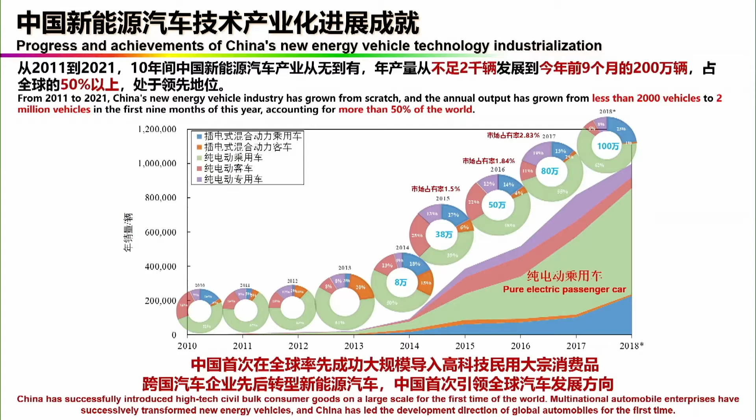Considering our history, this is the first time for China to introduce high-tech and high-volume consumer products in the world. And for the Chinese automotive industry, this is also the first time to lead the technical development directions in the world. So we can say this is an amazing achievement, and this is what is happening nowadays.

So people will ask several questions. The most important question is how does this happen, or why can this happen in China? What's the internal logic or reason? The second question may be, will these successful experiences also be effective in the future for China? And will they be learned or used by other countries in the future? These are very interesting and important topics, and tonight's lecture was prepared facing these three important questions.

So let's come to the first question. How did new energy vehicle technologies in China develop so quickly? The story goes back about 30 years. In 1992, the first proposal to develop new energy vehicles was made by Dr. Qian Xuesen, known as the father of the Chinese aerospace industry. He was very interested in China's automotive industry, and he wrote a letter to the central government explaining why China needed to develop electric vehicles and why this was a chance for us. But at that moment, China didn't have the conditions to develop this technology.

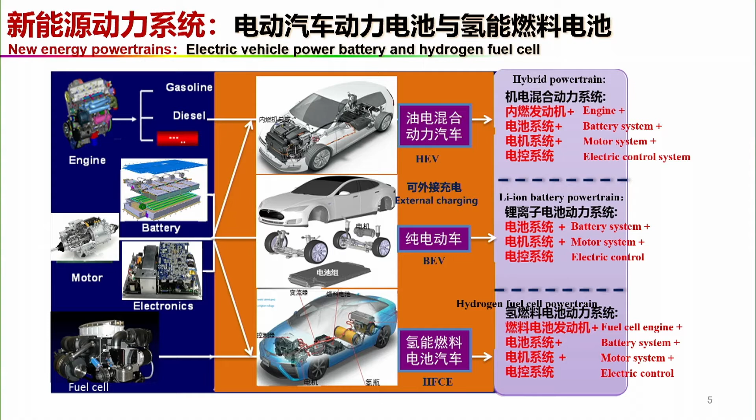detailed technical roadmaps. And actually, at that moment, about 15 years ago, there was lots of argument, lots of discussions on which kind of technology or which kind of technical roadmap is the best for the Chinese automotive industry. And in order to answer this question, the central government started several 5-year projects. So it starts from 2001, corresponding to the 10th 5-year project.

And after 2 5-year projects, at the end of the 11th 5-year project, that is around 2008, all the different kinds of new energy vehicle powertrains were developed and demonstrated in the Beijing Olympic Games. There were hybrid city buses, hydrogen fuel cell buses, and also battery electric vehicles. And all these technologies are compared with each other. And also the cost, the durability, the reliability are evaluated for the market

feasibility. And at that moment, the results are not very good, because as a research project, all of these projects have very good results. We can say all the research projects were successful, but it is not mature for the market introduction. And the only hope is on the battery electric vehicles, because some other technologies have very big issues, like the hydrogen fuel cell. The cost was still too high, and also the durability is short.

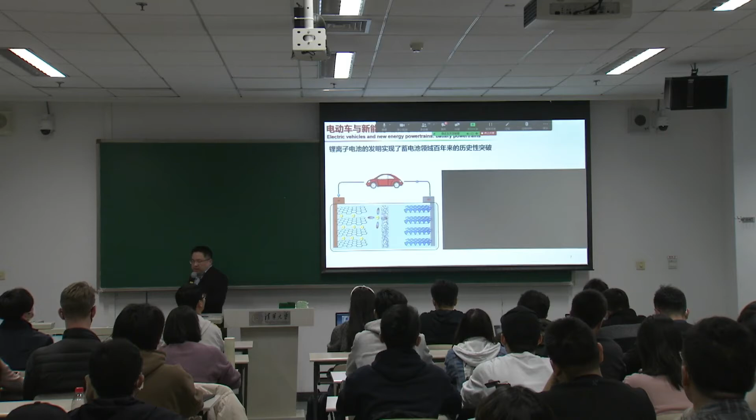And for the internal combustion engine hybrid technology, it needs fuel consumption and cannot realize zero emission. So the only hope relies on the battery electric vehicles. And on the other side, for the battery electric vehicles, the development of the lithium battery trend is very... the development of lithium battery technology.

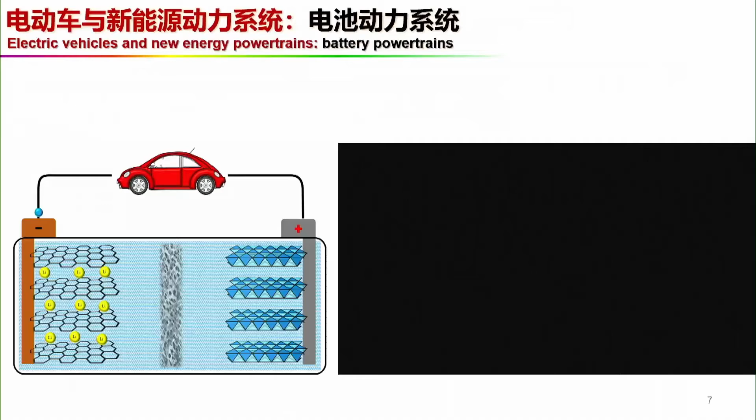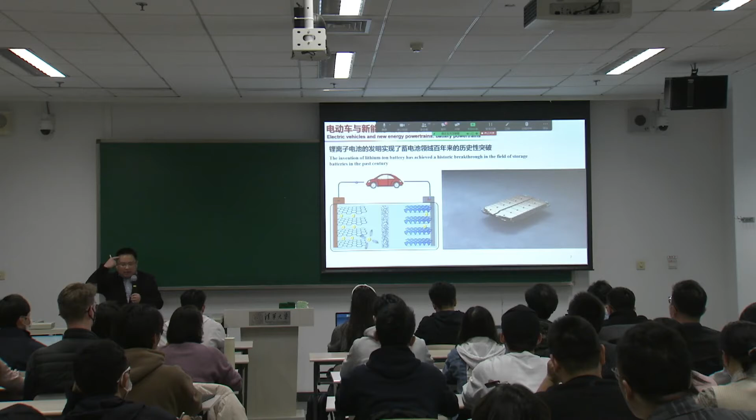Here is the video which was provided by General Motors, and we can see that for this lithium battery, this is a single cell, so lots of single cells compose a module, and this module can be integrated with the vehicle chassis very well, and this technology makes the design of the vehicle very flexible, and also the performance of the vehicle very good. So we can see that the invention of the lithium battery has achieved a historical breakthrough in the field of storage batteries in the past century. So this makes it possible to develop the new energy vehicles.

So in the year of 2009, the consulting expert group made several discussions and decided to focus on the pure battery-driven technology, which means if we want to develop new energy vehicles, the highest priority should be focused on the lithium battery and its corresponding pure battery-driven technologies. And after that, if we have this very good lithium battery technology, then we can develop the internal combustion engine hybrid vehicles, and then the hydrogen fuel cell vehicles. So this is the decision which was made in 2009.

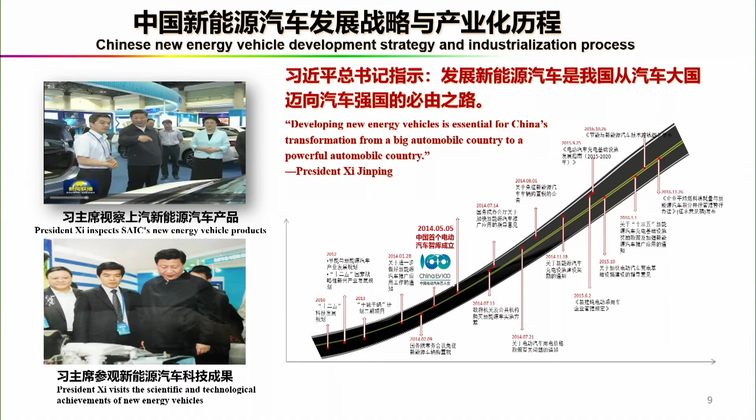And after that, the central government and also lots of local governments, that means the government for each province or each city, provided lots of policy support for the development of the new energy vehicle, especially the lithium battery and the battery electric vehicles. And then this technology developed very quickly.

And the competition in this area is not so high, so we suggested the companies enter this market first. And after we accumulate several experiences in technical development, then we can enter the medium and high-class passenger car market.

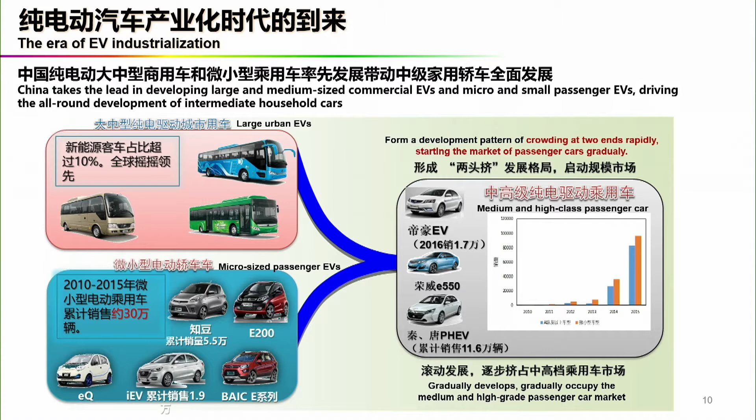So nowadays in China we can see lots of very high-performing electric vehicles, such as vehicles provided by Xiaopeng, by SAIC, by BYD, by Xiaomi or Lixiang or Weilai, such companies. So from any way, we can say that this strategy has a very successful result.

And it is predicted that 5 years later, by 2025, the cost of the lithium battery will be 0.5 yuan per watt hour. And nowadays the cycle lifetime is about between 5,000 to 10,000 times, which means this lithium battery's working lifetime can fully fulfill the requirement of automotive application.

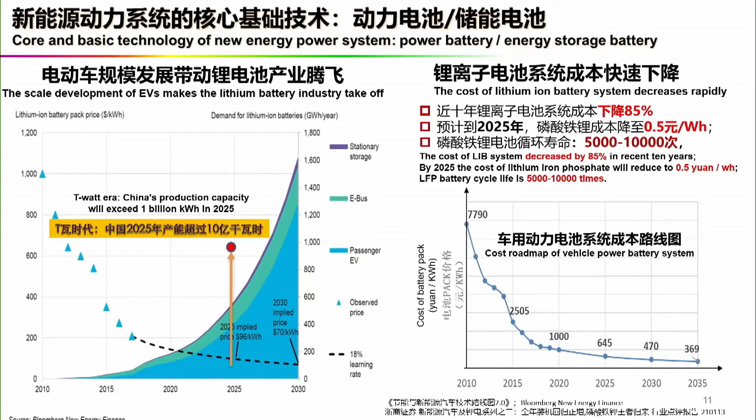And not only is the cost reduced in a very big gap, but also the energy density increases very rapidly. The power density of the lithium battery itself increased from less than 100 watt-hour per kilogram to more than 300 watt-hour per kilogram. And also for the system level, the specific energy increased from around 40 watt-hour per kilogram to about 200 watt-hour per kilogram. Wow, this technical development is also amazing.

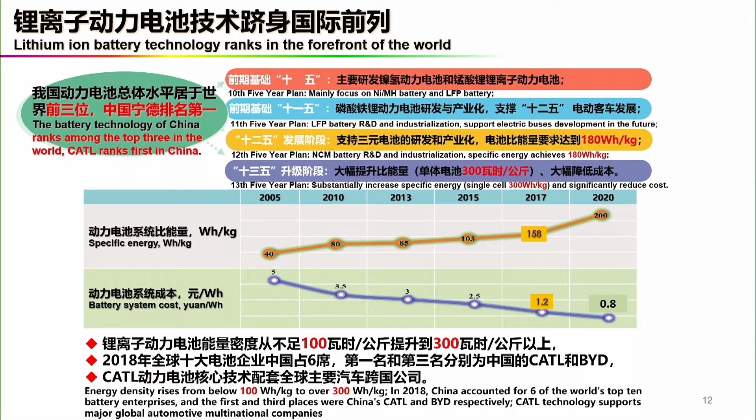So totally, we can say that the battery technology of China nowadays ranks among the top 3 in the world. And also the company CATL in China ranks actually first in the world in the battery industry. So this is the achievement of the battery industry.

And when we look into the key technologies, or the scientific issues of the lithium battery itself, we can see that the performance for mileage and life have been basically solved. So nowadays, the driving mileage of electric vehicles generally locates around 300 or 400 kilometers to 500 or 600 kilometers, which fulfills the requirement of our daily use.

But there are still several issues need to be solved. One is the thermal runaway for the safety problem. The other is the driving range decline problem in winter. And the third is the super fast charging - how to charge this battery very quickly. So our research also focuses on these several aspects.

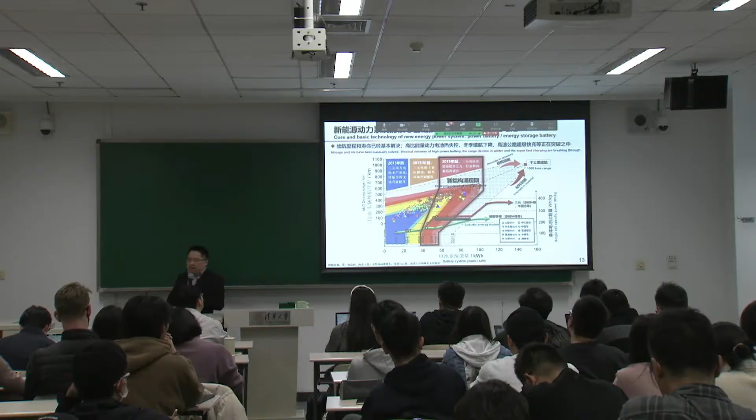And the target is to realize a battery system that can guarantee passenger cars that can provide more than 1,000 kilometers driving mileage, as well as guarantee its thermal runaway safety and also its reliability in winter time.

And this is some pictures of our lab. This lab is named the Battery Safety Laboratory. It's located in the Automotive Research Lab, in a small corner of the Tsinghua campus. We have a total area of 1,000 square meters, and about 80 research staff. We focus on battery safety issues, and we have very complete equipment and research facilities.

And one typical research outcome is, for example, we revealed the thermal runaway mechanism of high specific energy batteries. This type of battery is very popular in industry, but people didn't know how the thermal runaway happens. We did some research and made this secret open to the public, and we have some publications. On the other hand, the battery is of course very important.

But when we want to make the vehicle run, we need very high performance electrical driving systems. So the electrical driving system also developed very rapidly. The IGBT was started to be replaced by SiC, and the volume can be decreased to 20% of the original design. And also for the whole system design, we start to design the electrical motor, the electrical control unit, the mechanical...

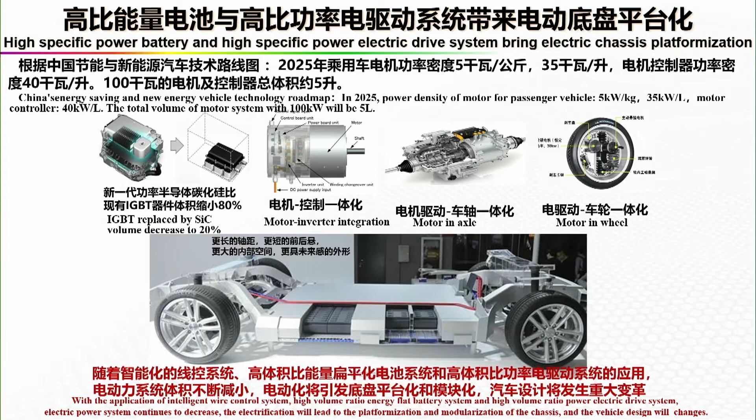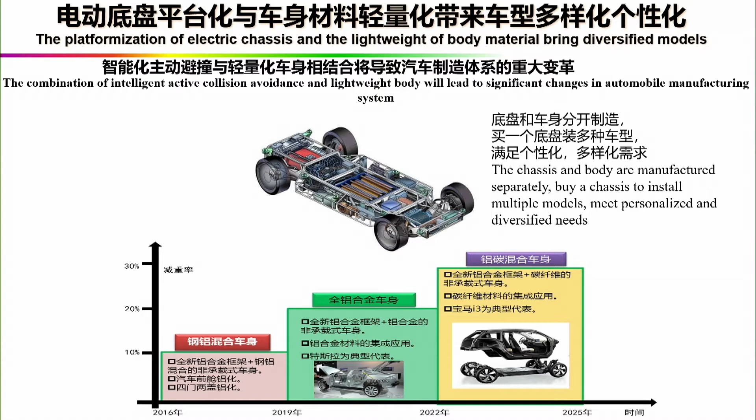These technologies together with the lightweight design and together with the intelligent active collision avoidance technologies, then we can design very high performance and also intelligent chassis platforms. And this kind of technology makes lots of possibilities, makes the design of the vehicle very flexible.

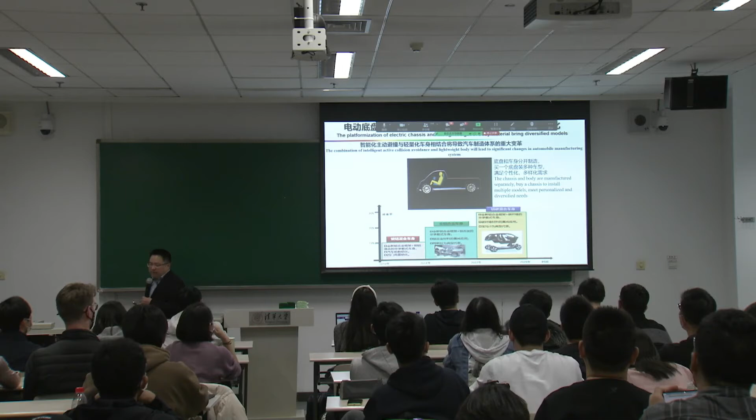That means the vehicle can be regarded as two parts. One is the intelligent electric driven chassis, and the other is the body. These two parts can be designed and produced separately and combined very compatibly to form different kinds of vehicles. We think this will make a big change in the future, not only for the automotive industry, but also for our daily lives.

Based on the prediction of the report named the Energy Saving and New Energy Vehicle Technology Roadmap 2.0, a very important report published by the Chinese Society of Automotive Engineering, it is predicted that the sales of new energy vehicles will reach about 40% to 50% of total automobile sales by 2030. By 2040, new energy vehicles will account for over half of total sales, and the number will exceed 300 million.

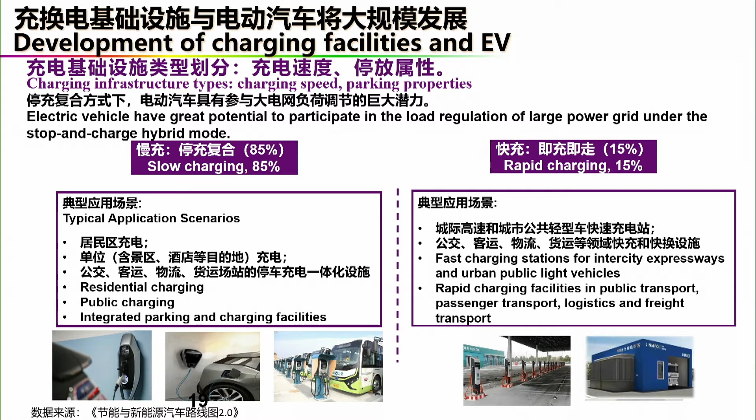For charging technology, we have two kinds: one is called slow charge, the other is called rapid charge. Slow charge is normally used in residential areas or public working areas, while rapid charging is normally used for intercity logistics, public light vehicles, or intercity public connections.

Nowadays the slow charge facilities occupy about 85%, and the rapid charge about 15%. All of this information indicates a big change in the automobile industry as well as in the energy industry.

When we look back into our history, about 100 years ago, there was a great transformation from horse-drawn carriages to automobiles. And then there was a great boom in the oil industry. So standing at nowadays, we think we may be also at another cross point of technical change.

So what will happen next in the next 20 or 30 years? We think there will be lots of changes in automobiles and also in the energy industry. The development of the automobile industry is always related to the energy sector, so let's look at the energy industry.

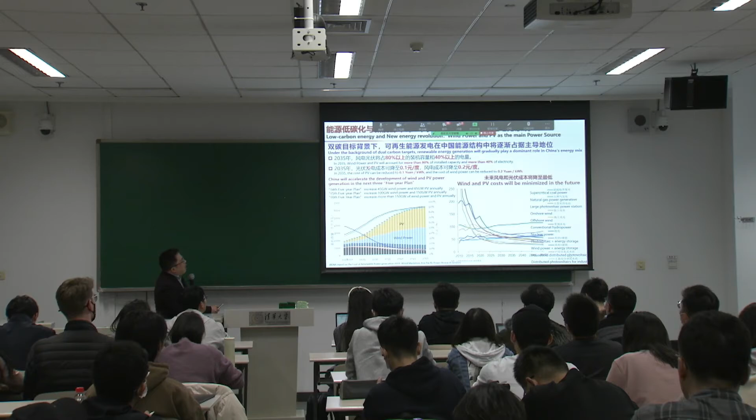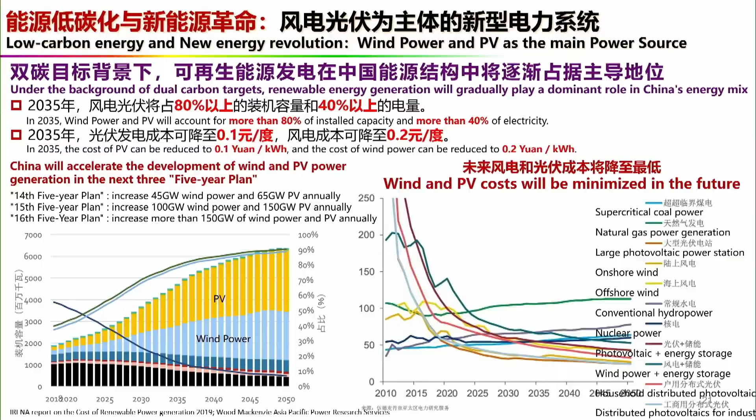Also in that year, the cost of renewable energy, mainly wind power and PV power, will be very low: the cost of PV power can be reduced to 0.1 yuan per kilowatt hour, and the cost of wind power can be reduced to 0.2 yuan per kilowatt hour.

That means if we use renewable energy as the original energy source, the cost of fuel or the operation energy for vehicles can be almost ignored. This is very good information for our automotive industry.

Based on this result, we can make an analysis of the technical cost with different technical combinations. In this figure, all the energy comes from renewable energy, mainly wind power, solar, or bioenergy, and the outcome of the powertrain includes battery electric vehicles, hydrogen fuel cell electric vehicles, and traditional internal combustion engines.

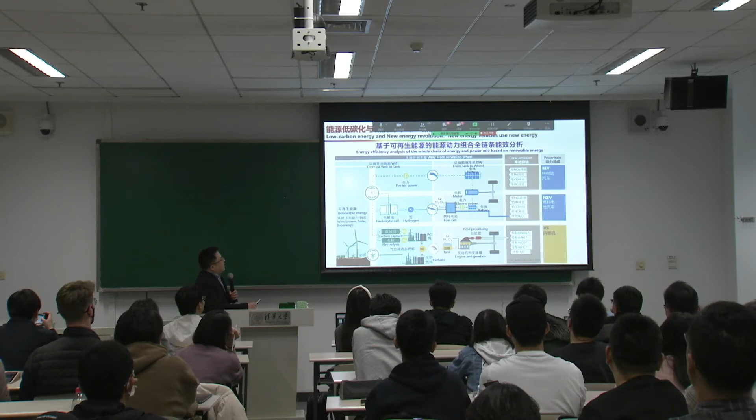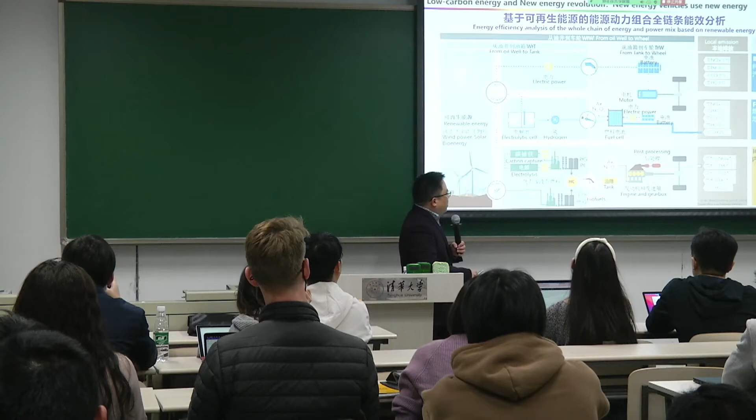Here we can see there are lots of technical roadmaps. The energy comes from renewable energy. It can go to electrical power or to the electrolyzer to produce hydrogen, or combine with some other materials to produce biofuels. With this electric energy, hydrogen, biofuels, or other energy carrier fuels, we can go to different powertrains and have different efficiency.

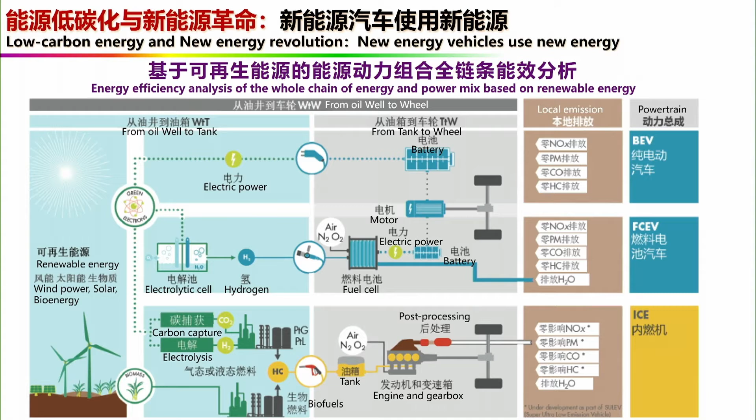There are lots of complex technical roadmaps, and after some calculation, we can get the overall efficiency. This overall efficiency indicates the efficiency of the powertrain from the very beginning, the renewable energy, so all the energy, 100% of it, comes from renewable energy.

When we use battery electric vehicles with this energy, the efficiency is about 77%. When we use hydrogen fuel cell, the efficiency is about 30%. And when we use traditional internal combustion engine, the efficiency is about 13%.

So we can see that if we only consider the well-to-wheel efficiency, battery electric vehicles have a very obvious advantage over some other technologies, and hydrogen fuel cells are worse than battery electric vehicles.

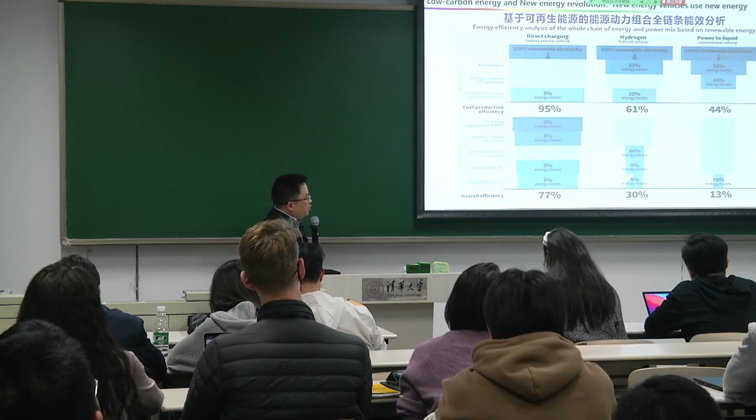But if we use hydrogen fuel cells, they have advantages in driving mileage, charging time, or refueling time. But for internal combustion engines, it seems there's no reason to develop such technology in the future when we use 100% renewable energy. So this is a major conclusion.

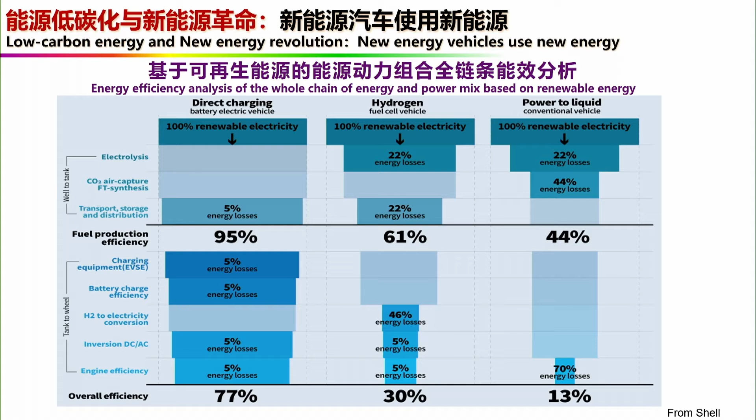Based on this, in our future development, the technical roadmaps are mainly focused on battery electric vehicles and hydrogen fuel cell vehicles. So this is the reason, or the internal logic, why nowadays almost everyone in the automobile industry or the energy industry is discussing electric vehicles or hydrogen fuel cell vehicles.

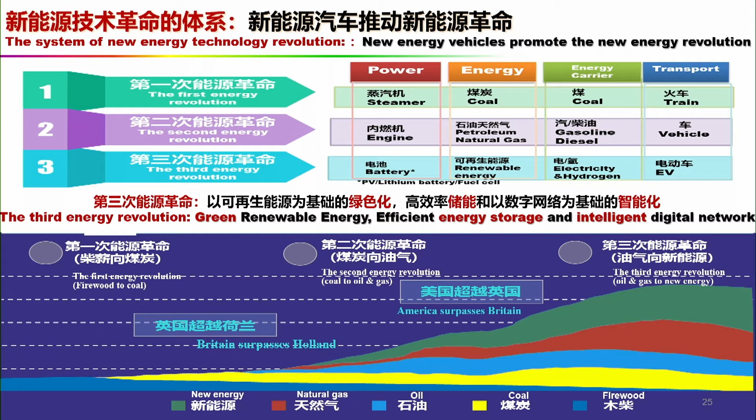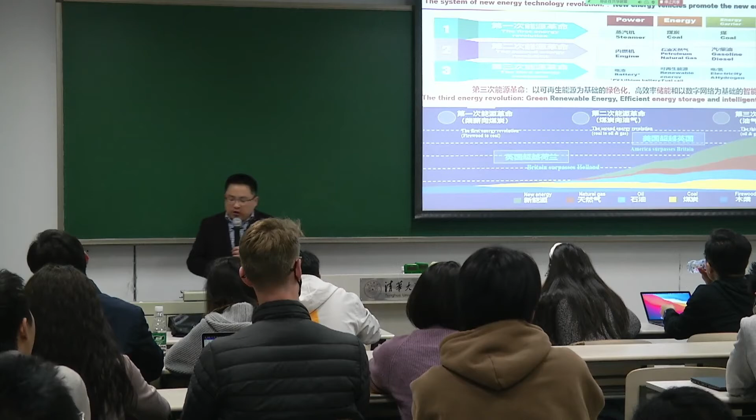As a basic technology, the third energy revolution contains three parts: one is green renewable energy, the second is efficient energy storage technology, and the third is the intelligent digital network.

When we go further, we can see more elements - we call it the 5 pillars of the new energy revolution. The first is renewable energy as a power source. The second is that energy production or consumption changes from a centralized style.

Energy production and consumption changes from centralized style to distributed style, meaning the coordination technologies become much harder or more difficult. Third, we need to use hydrogen or battery to store the intermediate energy, and the fourth is we need to develop the energy internet technology, meaning to distribute, connect, and coordinate energy production and consumption.

And the fifth, which is also very important, is that battery electric vehicles will be regarded as an energy consumer and also as energy storage for the energy grid. So this is the basic idea.

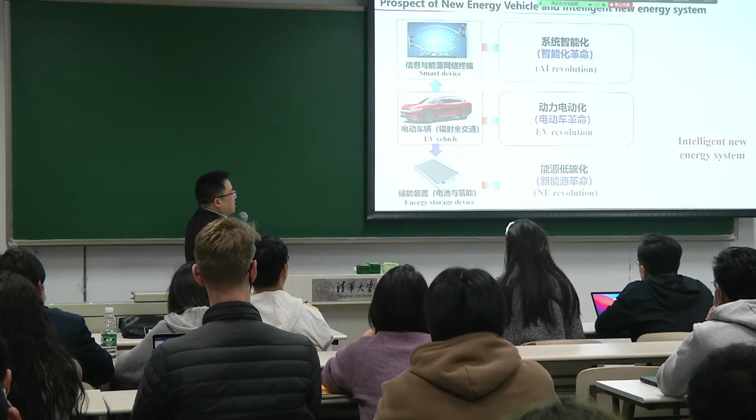Because the electric vehicle revolution contains the power technologies and also the artificial intelligence technologies. And electric vehicles can also serve as battery storage in the new energy system, so it is also an element of the new energy revolution. And at the control, coordination, or information level, there is the artificial intelligence revolution, which also influences the electric vehicle revolution and the new energy revolution.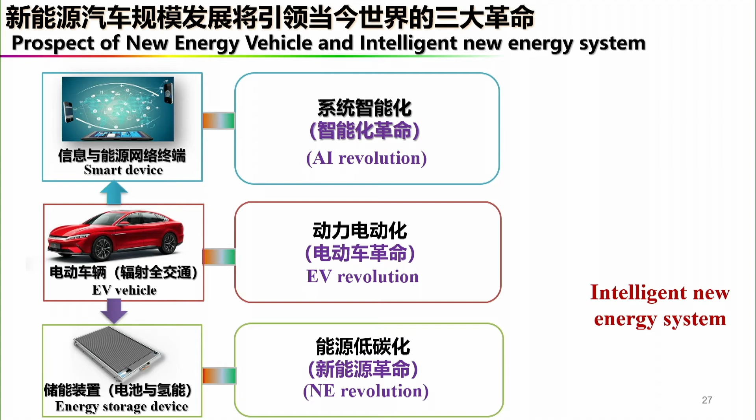So these three revolutions combined together, we call the intelligent new energy systems. The outcome of all the revolutions together is intelligent new energy systems for everything, for the transportation system as well as for the whole society. This is what we think will happen by 2030 or even longer in the future.

The second part is battery energy storage and vehicle network integration. As mentioned above, among the three revolutions, the electric vehicle revolution is the center, and battery technology is the center of the electric vehicle. So the battery, or energy storage technology, is a key point.

There are lots of energy storage technologies nowadays, like lithium batteries, flow batteries, hydrogen, and other technologies. When we focus on electrochemical technologies, there are two major kinds: energy storage batteries and hydrogen energy storage technologies. Batteries and hydrogen have their own characteristics. They are highly complementary and will become the main methods of energy storage in the future.

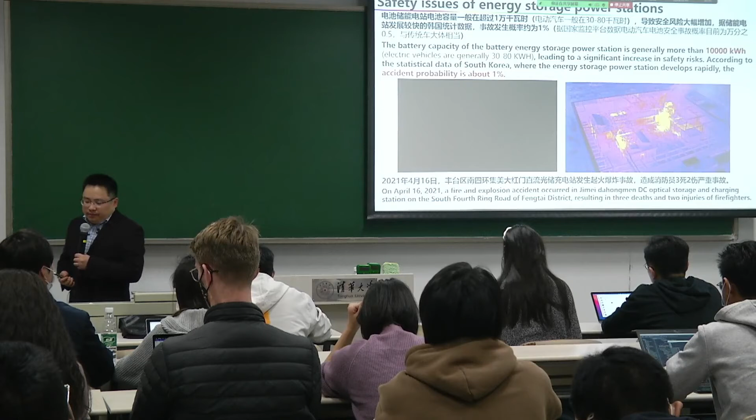Based on statistics, for a fixed energy storage station composed of batteries, the storage capacity is normally more than 10,000 kilowatt hours, a very huge number. Such capacity normally contains from several thousand to 10,000 single cells, which makes the accident probability much higher, normally about 1%. That means it is very possible for such a fixed storage station to have this kind of accident.

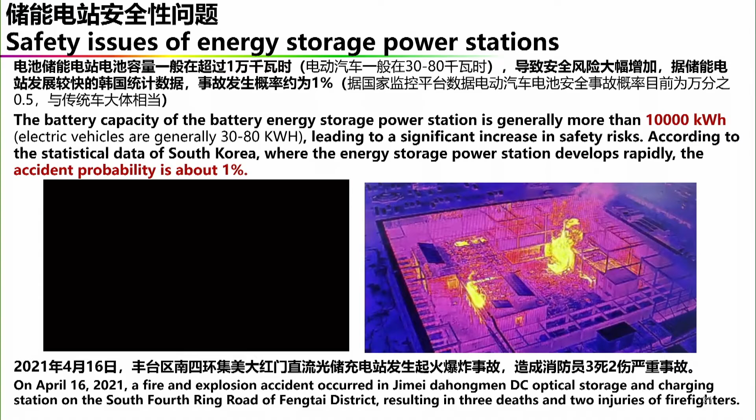So based on these two technical challenges, there's the idea of V2G technology, vehicle-to-grid interactive energy storage technology. That means using the battery in electric vehicles as a movable, portable energy storage device. This is the basic idea.

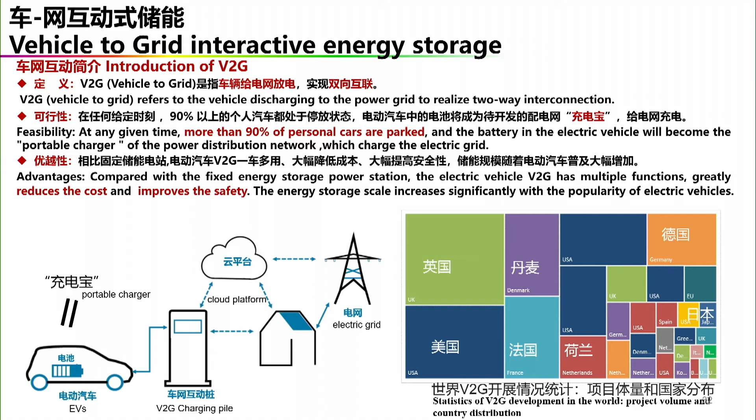The feasibility of this technology is that, based on our statistical results, more than 90% of personal cars are parked and not used, and for these cars, the battery inside can be used as an energy storage system for the energy grid. That's the basic idea.

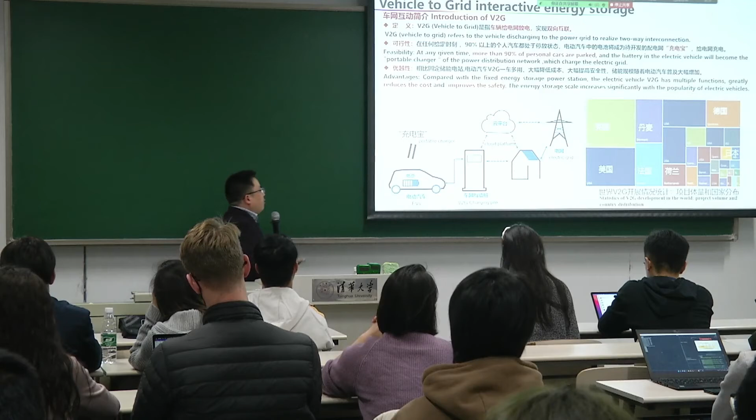By using this technology, we can greatly reduce the cost of building fixed energy storage stations, and we can also improve safety, because each vehicle has a battery management system that monitors the states of the battery, and the safety of the battery inside the vehicle is much higher than that of the battery in a fixed storage station. So this is the basic idea.

And how does this happen? Here is a basic idea of this technology. On these two curves, there is the curve with the blue shadow, this line. This line is the traditional power requirement without electric vehicles. Normally there are two peaks.

One appears in the morning, and the other appears at night before people go to sleep. And based on this, we can add the battery charging and discharging power onto this curve. The precondition is that if the battery charging and discharging behavior is not suitably controlled, the peak will get much higher, and the lower part will get much lower. So this is negative.

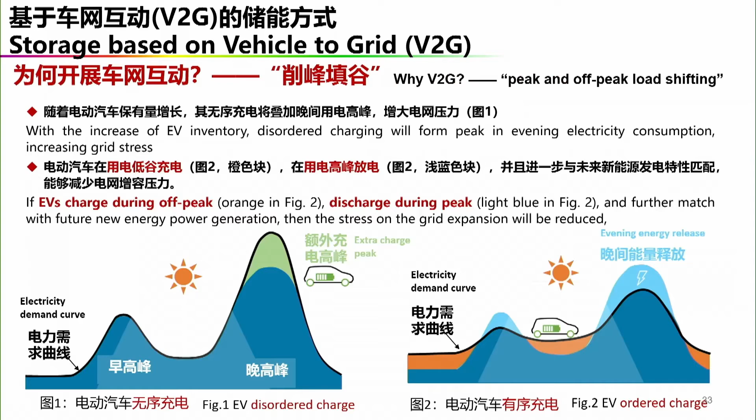But if the charging and discharging behavior can be coordinated, or controlled, or managed suitably with some intelligent technologies, then the peak can get lower, and the valley part can get higher. That means the electrical power requirement curve can be much flatter, and this is very desirable for the energy grids. So this is called disordered charge and ordered charge.

For more details, there are some calculations reported in an England report, and they give this result. This result showed that if all the electric batteries are disordered or not coordinated, when the number of electric vehicles increases, we need to increase the charging and discharging power of the national grid. This is almost unacceptable because larger power means bigger charging and discharging facilities, larger charging and discharging current, more cost, and much lower safety.

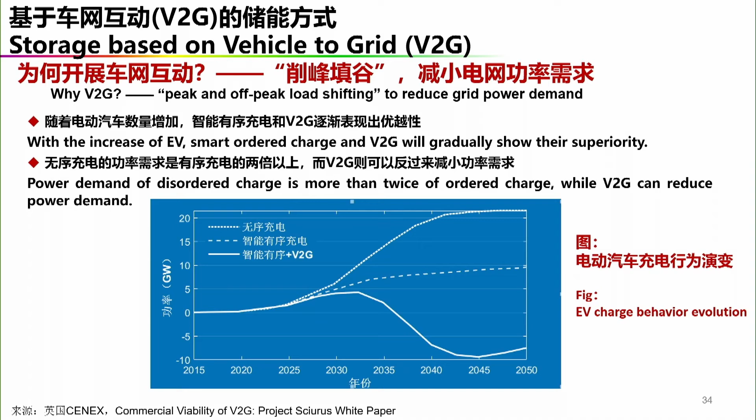But when we use intelligent ordered charging technology, this power can be reduced. When we use V2G technologies with this intelligent ordered charging, the power requirement of the energy grid may even be reduced. So all of these can be realized based on big data and intelligent technologies. So these are the advantages of this V2G interactive charging technology.

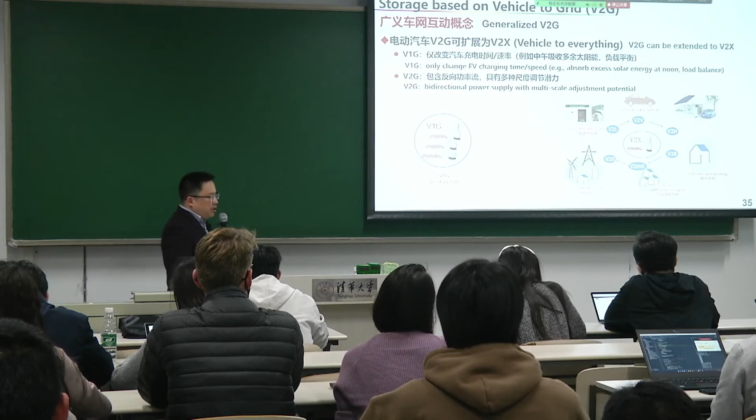And this idea can be generalized to other parts. For example, we start from V2G, and then we can develop V2V, vehicle to load, vehicle to home, vehicle to building, vehicle to microgrid, and vehicle to the grid at the national level. So there is lots of innovation space, lots of chances to do scientific research and also to do innovation in industry.

And here is the comparison of battery energy storage technology, where on one side we use the fixed battery energy storage system, and on the other side we use the electric vehicle as the battery energy storage system. We can see that the capacity of these two is similar. But with electric vehicles, we don't need extra investment to build fixed storage stations, and the charging time of the fixed storage station is fixed.

But for battery electric vehicles, it needs flexible, intelligent charging time. And for building space, the fixed BESS requires some space to store the fixed battery. But for the EV BESS, there's no requirement for space and no requirement for new investment, and the safety risk is much lower.

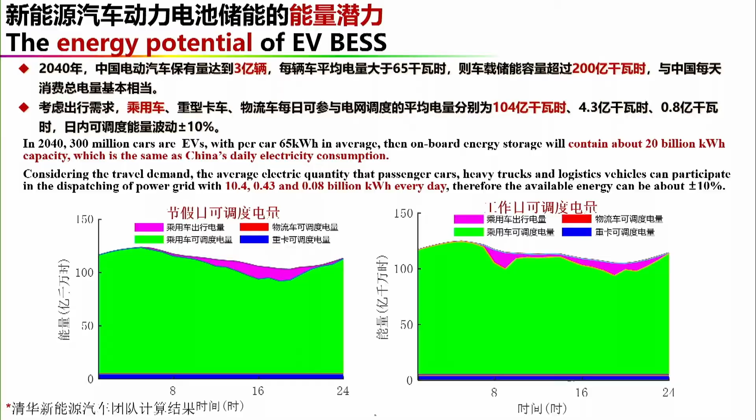So that means if we use these intelligent systems to coordinate the electric vehicles all over China, the discharging energy can provide daily use. That means in an ideal situation, there's no need for renewable energy production. That's the ideal situation. On the other side, this technology has very great power potential.

Based on one estimation for the situation of 2021, for example, Beijing has about 500,000 EVs, and with this number, the power support of EVs can reach about 7 million kilowatts, which is 1/4 of the maximum load of Beijing this year.

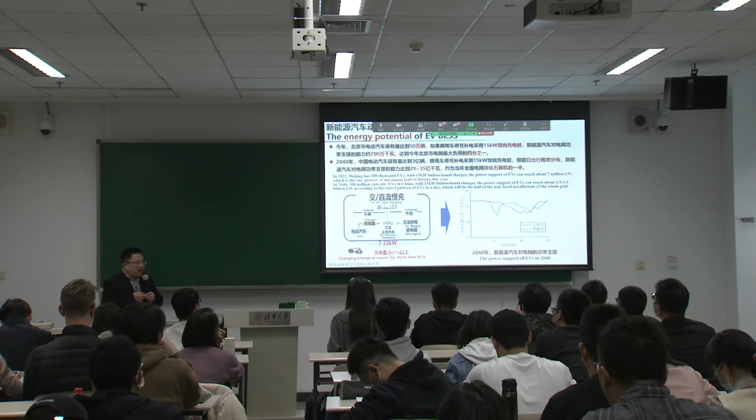That means if we use the electric vehicles in Beijing nowadays as a power source to provide power to the grid, then about one quarter of the power can be supplied by the energy from EVs, and the rest, that means the power supplement of the grid, can be reduced by one quarter.

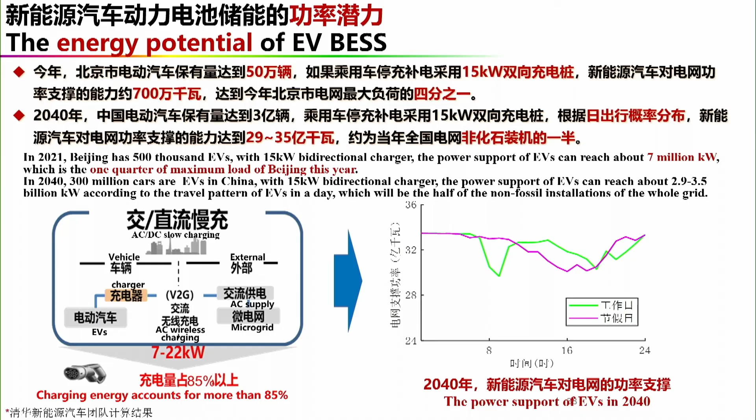So that also means we can reduce the investment of the charging facilities by about 1/4. It's a very big number. Okay, so how can this technology be realized? This gives a basic idea. Normally we can separate this technology into 3 layers.

This is a local layer which deals with the interactive charging and discharging facility activities, and the other is the aggregation layer, which combines different information together and realizes some algorithm to decide which vehicle needs to discharge to the grid, and which vehicle needs to charge from the grid. And on the top is the dispatching layer, which collects all of the data from different agencies.

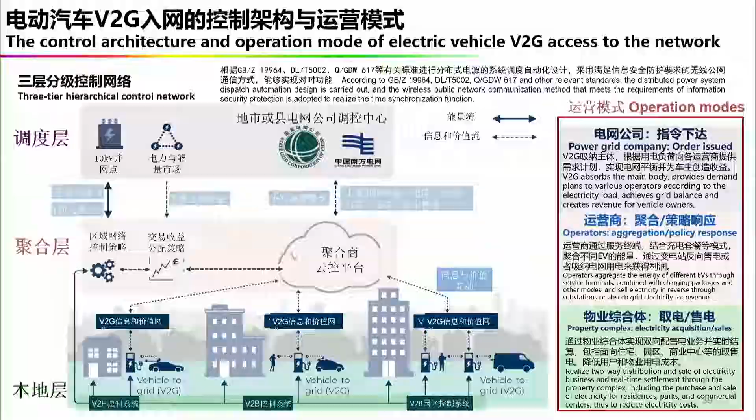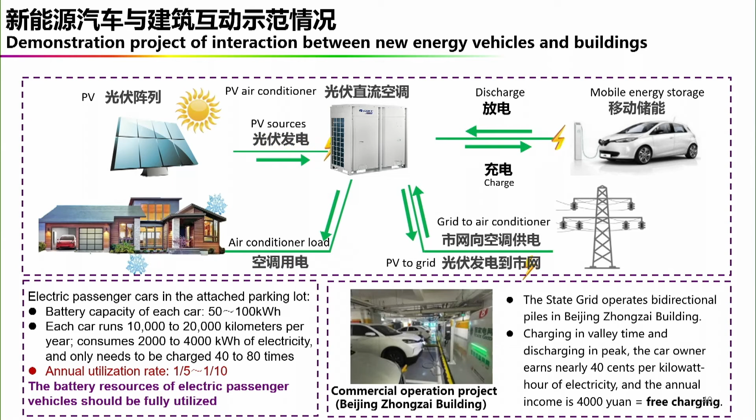And also we started to do some demonstration projects in China. This is a project in Beijing around Zhangjiakou. So in Beijing, in Zhongzai building, in this figure we can see that we combined the PV power, the mobile energy storage, the national grid and the building together to have a flexible energy distribution system.

And for this V2G technology, we also developed a roadmap to realize this total intelligent system. It is predicted that in the next 5 years ordered charging will be realized. That means all the electric vehicles' charging and discharging behaviors will be coordinated by some intelligent

algorithms. And after that, V2G, V2 Home, and some other technologies will be developed, and by 2030 or 2040, the total system will be realized. So this is our target. And later I will shortly introduce the hydrogen and fuel cell technologies.

As introduced just now, the third energy revolution contains 3 key technologies. One is green renewable energy. The second is energy storage technology. The third is artificial intelligence technology. And for energy storage, there's battery storage and also hydrogen storage. Now, hydrogen storage is also very important.

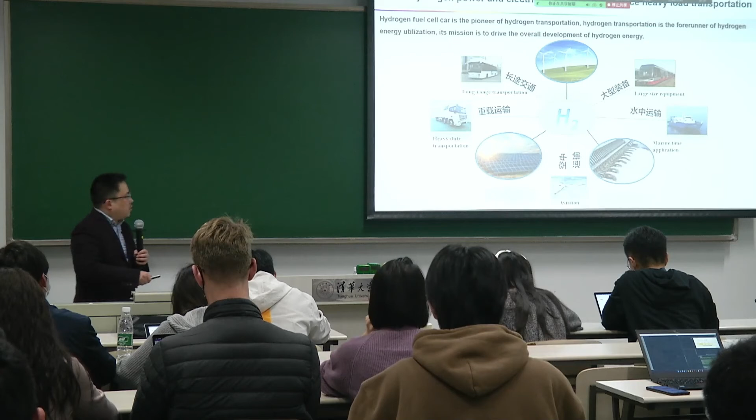And also the cost and some other technical bottlenecks are much higher than the energy storage battery technologies. And hydrogen will be used in lots of aspects, for example, heavy-duty, long-range driving situations like heavy trucks, trams, boats, and also aviation.

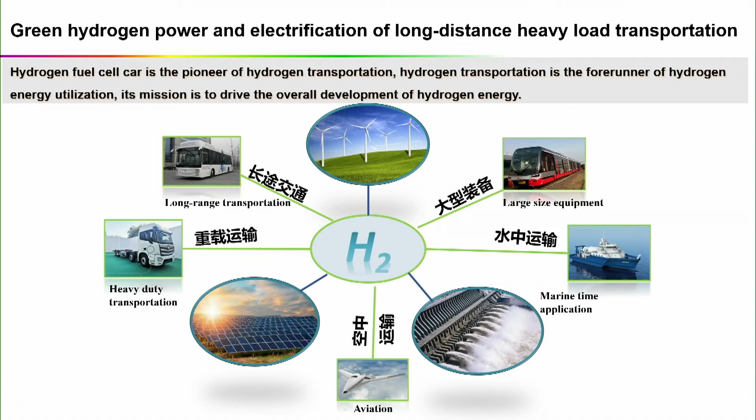And for hydrogen technology, there are 2 aspects. One is the fuel cell technology. The principle of fuel cell technology is to change the energy in hydrogen into electric energy, and in the automotive industry we call it the fuel cell engine. Why is it the fuel cell engine? Because it looks very similar to the internal combustion engine.

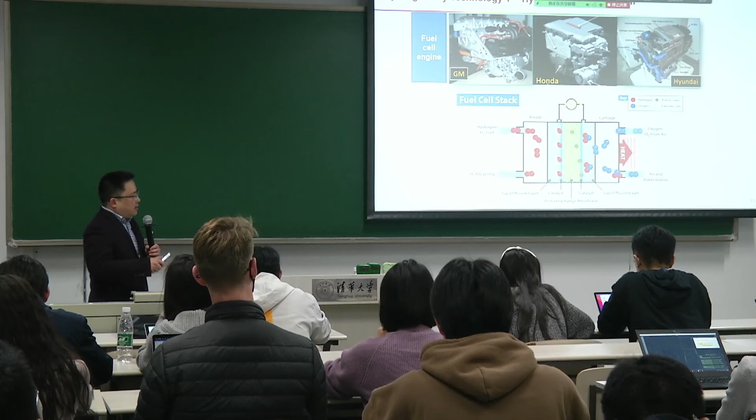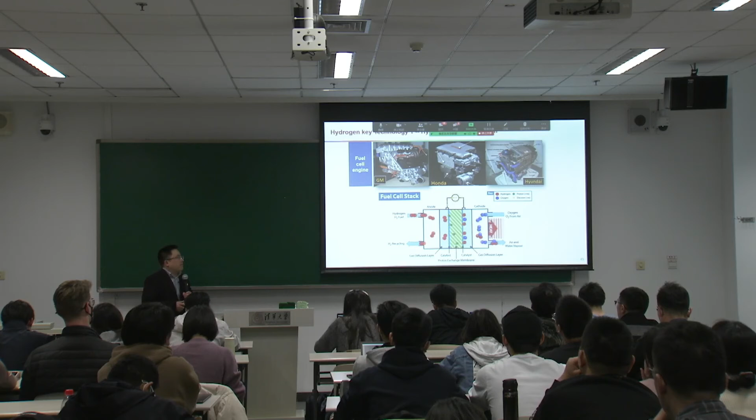The core inside the fuel cell engine is the electrochemical reaction cells, and the balance of plant of this fuel cell stack contains the air supply system, the hydrogen supply system, and the cooling system, which is very similar to the internal combustion engine. And here we can see some examples provided by General Motors, Honda, and Hyundai.

And in China, in the past 20 years, we have developed hydrogen and fuel cell technologies using a top-down technical roadmap. That means we started from the powertrain technology, then we focused on the fuel cell engine technology, then we focused on the fuel cell stack, and finally we went into the material level.

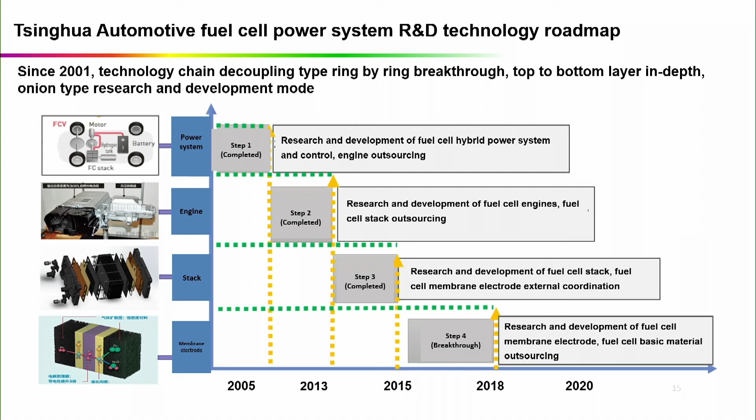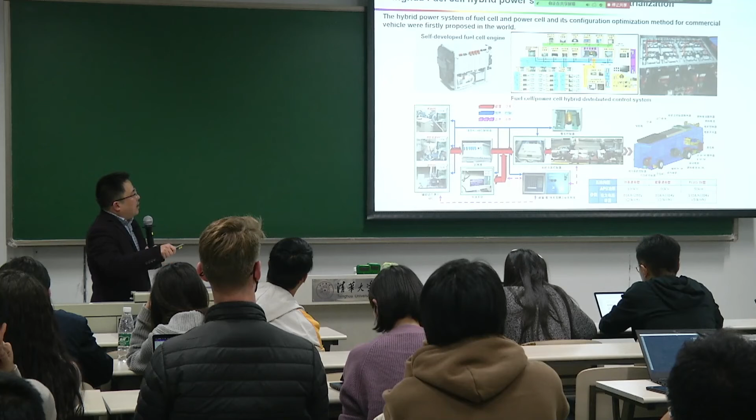And these are some examples of our research project about 10 years ago for the hydrogen fuel cell city buses, which were demonstrated at the Beijing Olympic Games. Here we designed very complex distributed powertrains with fuel cell engines as a core part, and also some network communication and control systems.

This project was led by Professor Ouyang, and here are some figures from the 2008 Beijing Olympic Games. At that moment, we had fuel cell city buses, fuel cell passenger cars, and China's first hydrogen station was also built at that moment.

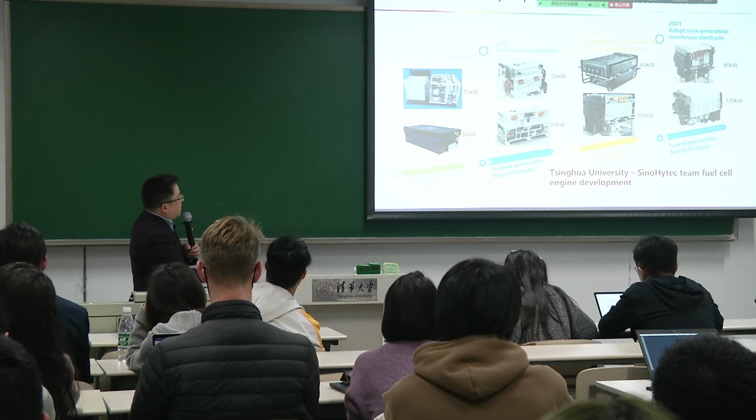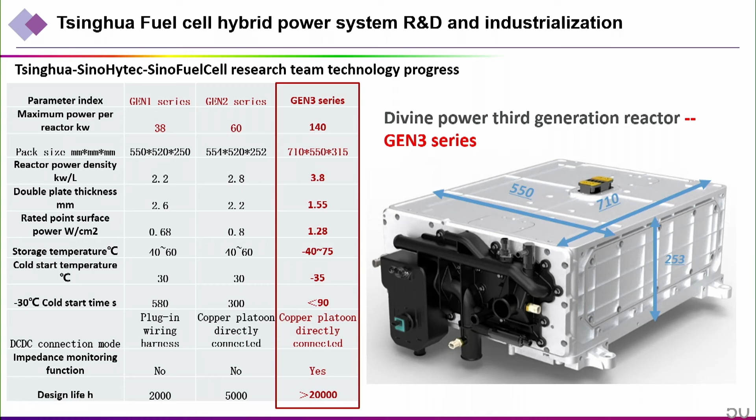And after that, according to the top-down strategy, we changed our focus to the fuel cell system. So we developed 4 generations of fuel cell engines with SinoHytec group, and also we developed an advanced fuel cell stack with a SinoFuelCell company, and the performance of this GEN3 series is very close to the top level internationally.

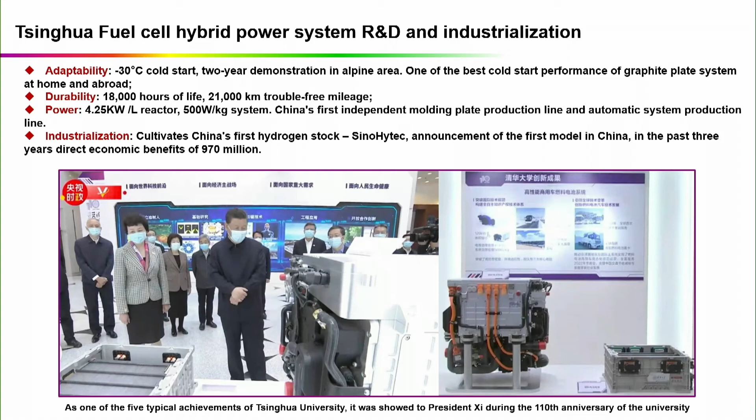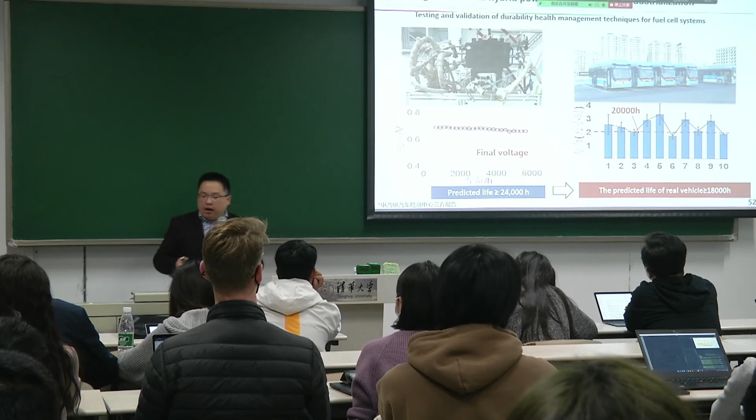Also, these technologies gained attention from President Xi, and this technology has highly positive comments from the central government. And nowadays, the durability of the working lifetime of the fuel cell system exceeds 18,000 hours, and in some cases it can even reach 20,000 hours. That means this technology, in terms of durability, can be used in automotive applications.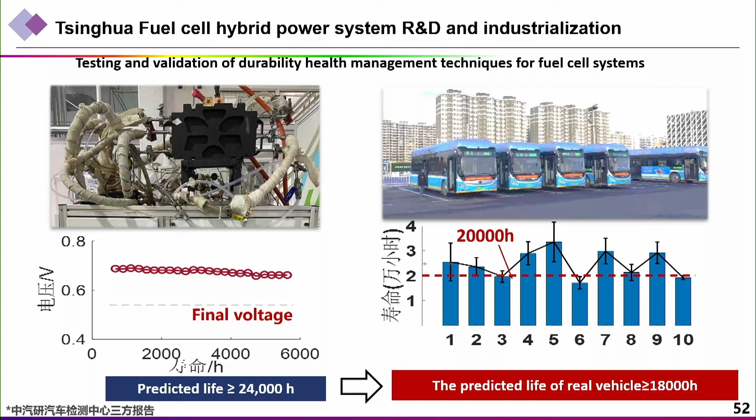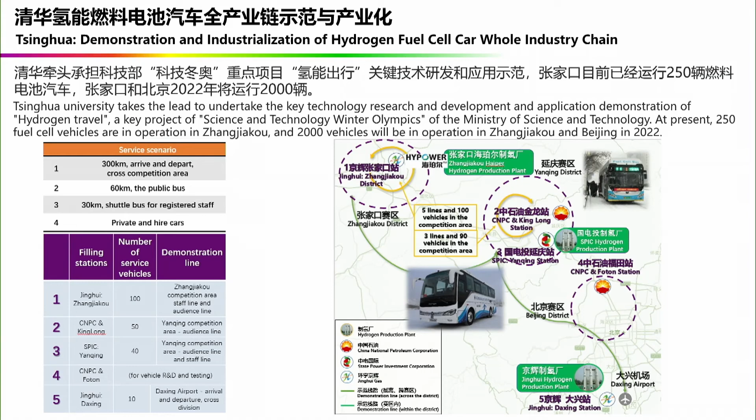Later in the Winter Olympic Games, which will happen very soon, in several months, there will be a hydrogen and fuel cell demonstration project. There are several areas where we build lots of hydrogen refueling stations, and there will be around 2,000 hydrogen fuel cell vehicles operating in the routes between Beijing, Zhangjiakou, and some areas.

And in the future, it is predicted that the cost of the fuel cell system in the next 5 to 10 years will reduce 80%. That means the total cost after 10 or 20 years will be 20% of the cost nowadays. And this process is very similar to what has happened with the lithium battery in the past 10 years.

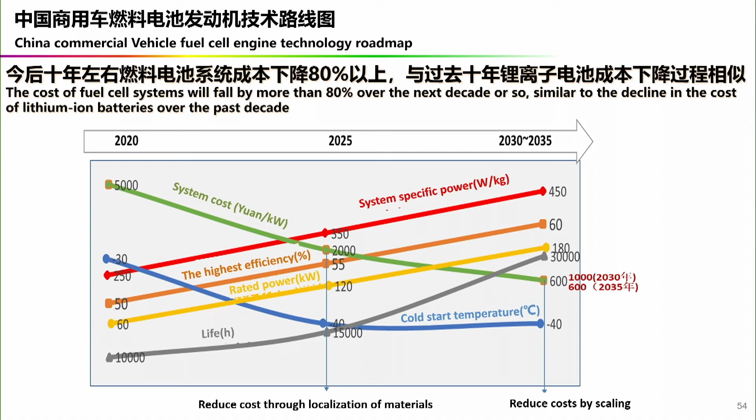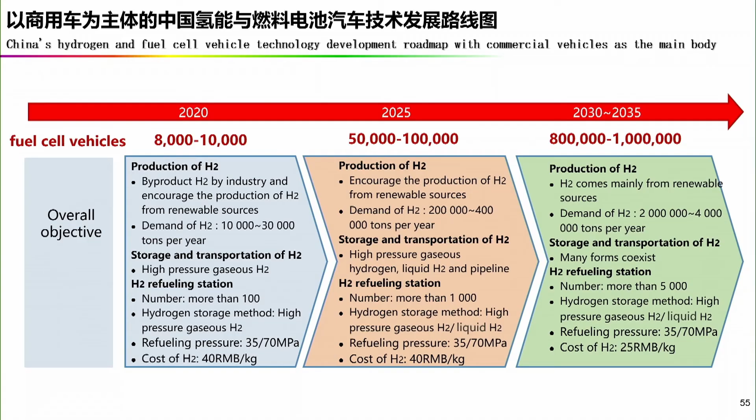And this is our very rough prediction of fuel cell development in the next 5 to 10 years. We think in the next years there will be a very big jump in the number of fuel cell vehicles, as well as hydrogen charging stations, and also the cost will be greatly reduced, and all the performance indices will be greatly improved.

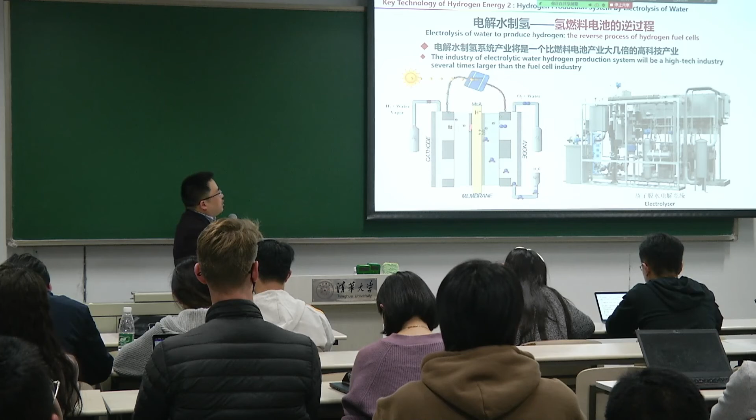On the other side is the technology of the water electrolyzer. A water electrolyzer can be regarded as an inverse process of the fuel cell. For the fuel cell, hydrogen and oxygen meet together to produce electric energy and release heat and water. In the water electrolyzer, we feed the system with electricity and water, and the outcome is hydrogen and oxygen. So this technology can be regarded as storing electric energy in oxygen and hydrogen. And on the right hand side is a prototype of the electrolyzer.

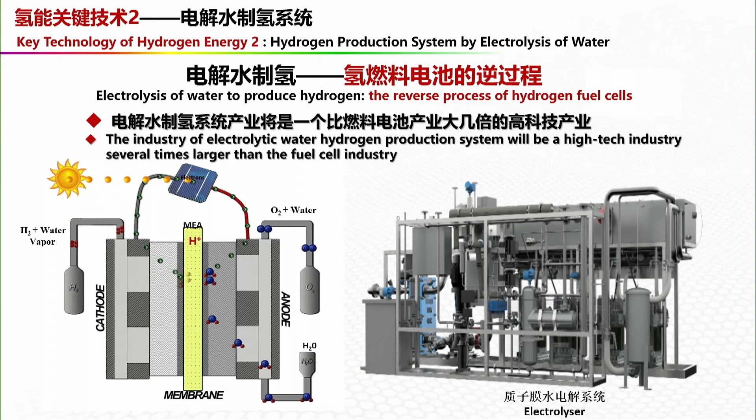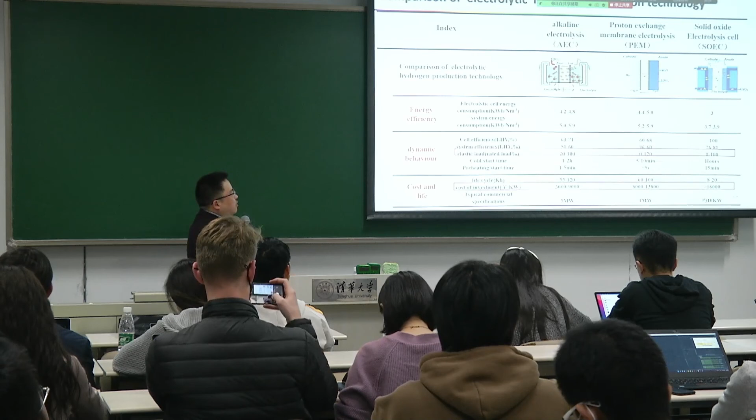For this technology, there are several sub-technologies like alkaline electrolysis, proton exchange membrane electrolysis, and the solid oxide electrolysis cell. Each technology has different properties in dynamic response behavior, and also in cost and life. Currently, alkaline electrolysis has relatively lower cost and relatively high durability. But for all of these technologies, durability is the common challenge. In the future, the durability needs to be improved and the cost needs to be reduced.

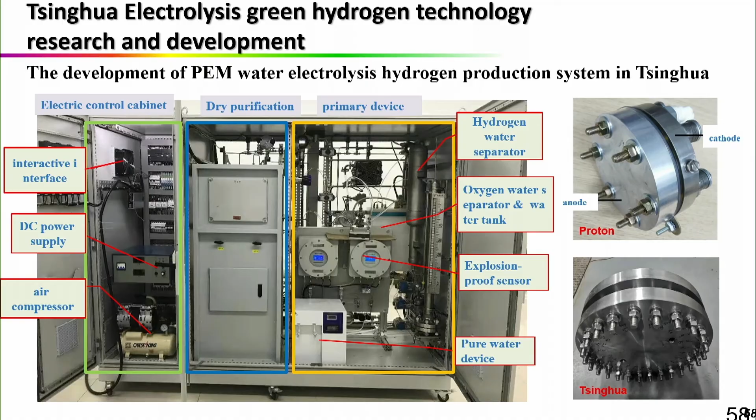And in Tsinghua, in our research group, this is the prototype which was designed by our research group and produced with cooperative companies. It is the PEM water electrolyzer, which can produce hydrogen with this facility. And we also developed another prototype of the SOEC, the solid oxide electrolyzer cell, with some Chinese cooperative companies.

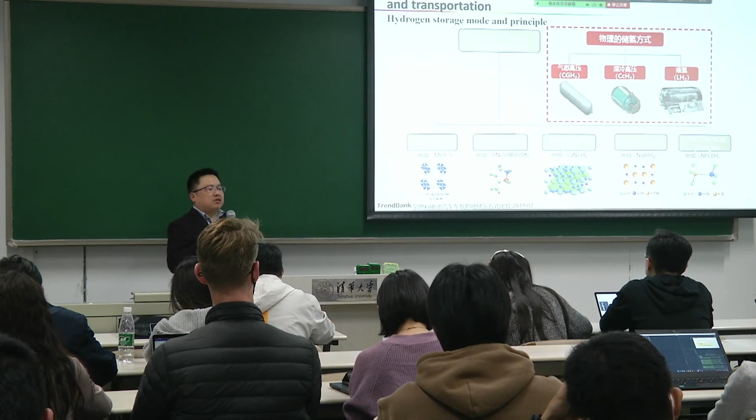And also there are lots of technical routes for hydrogen storage. It can be stored as highly compressed gas at 700 bar or 350 bar, or as cryo-compressed hydrogen, and it can also be stored as liquid hydrogen. Hydrogen can also be stored with material-based technology. So nowadays there are different technical roadmaps on how to produce hydrogen, how to store hydrogen, and how to distribute hydrogen.

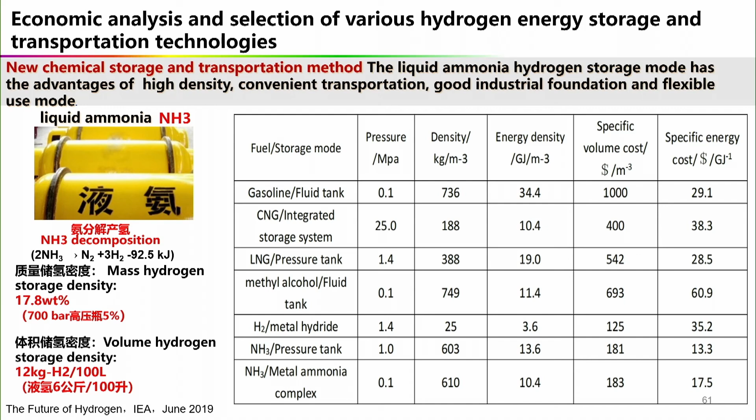Another very good technology for hydrogen storage is to use ammonia. Ammonia is also very important, and this technology is highly developed in foreign countries, such as Japan, Europe, and the US. We think ammonia has very good advantages in energy storage density and especially its cost. So in China nowadays we are comparing different technical roadmaps for hydrogen to find the most suitable one for China's hydrogen and fuel cell industry.

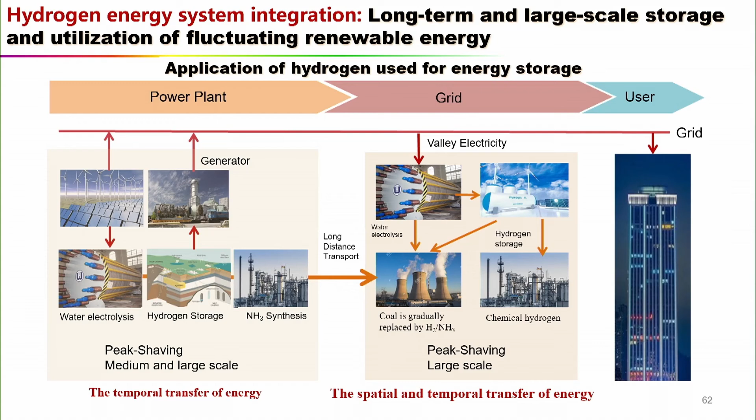And as a result, we can see that hydrogen is one of the best choices for long-term and large-scale renewable energy storage. Why? Because of its energy utilization; the storage efficiency is very high. Second, the price is relatively lower than battery storage systems. It is also complementary with battery storage systems. And the production, transportation, and storage are very flexible. It has different technical roadmaps.

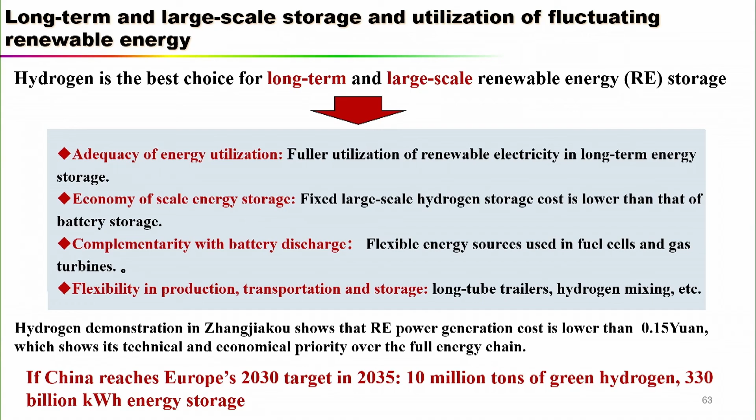And on the other side, we can see that there are also technical issues of hydrogen production, storage, and distribution, and there is lots of work that needs to be done in the future. And for this part, there are also different demonstration projects in China to compare different technologies.

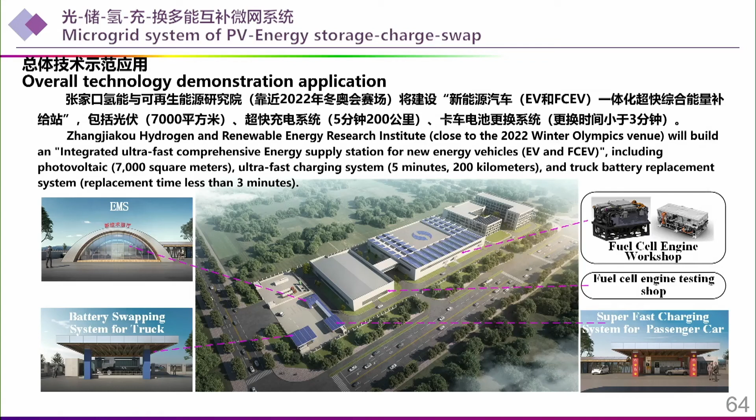For example, this project is in Zhangjiakou, and we will combine the technology of new energy vehicles, including the battery electric vehicle and hydrogen fuel cell vehicle, together with hydrogen refueling stations and battery charging stations, and also together with wind power and PV power as renewable energy, to evaluate the technical cost and the life cycle cost of different technical roadmaps, and maybe after several years we will find a relatively good solution for the future development.

And around us we have 15 companies that were established by our students, and all of these companies focus on several key points related to new energy vehicles. And in the past years, our research results successfully gained attention from the central government, and Professor Ouyang introduced several research results to our leaders.